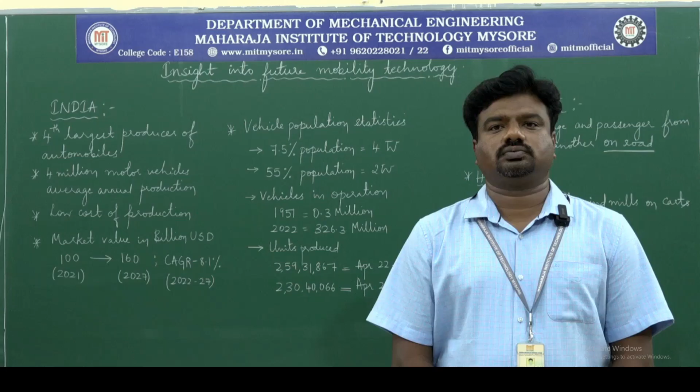Today I am here to deliver a session on insight into future mobility technology. Let us try to understand what do you mean by the phrase insight into future mobility technology. See, the word insight refers to the detailed or complete understanding on things or the area wherein the objective is focused accurately. Means to say that to gain an accurate knowledge on something or some area wherein we are focusing, that refers to the word insight.

Then the word future mobility technology. It is a common identity for a mechanical engineer to possess his passion towards automobiles. Yes, what do you mean by automobiles? Automobile means it is a carrier which carries the luggage or passengers as well as the luggage and passenger from one place to another place on road. So whenever we are focusing on transportation of human beings and luggages and animals on road through a medium where we opt for vehicles, we categorize that as automobiles.

While if it is on water, we go with marine engineering. Whether it is in air, we study the content under aerospace engineering through airplanes. Okay, see, the evolution of automobile engineering is not from 19th or 20th century. It is seen from the 17th century when people started using the mounting of small windmills onto the cartwheels, so that as and when the cartwheels are carrying the passengers from one place to another place, these windmills used to obtain the energy from wind and convert that energy into the motion or the movement through wheels.

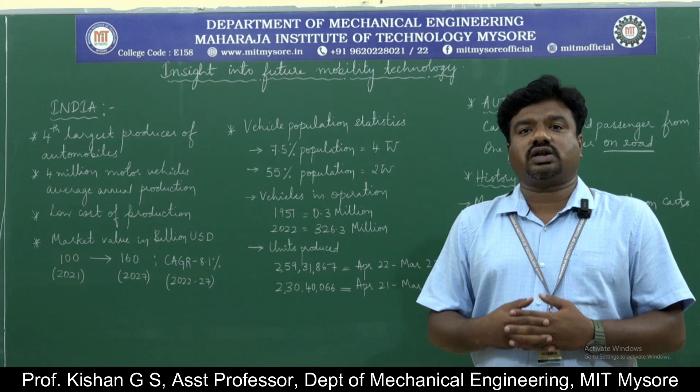This particular data relates to why we consider India to be the automobile manufacturing hub, or what is making India the fourth largest producer of automobiles. See, between April 2021 and March 2022, the number of units, that is number of automobiles produced, were 2 crore 30 lakh 40,066, while in the financial year 2022-23, the number of units increased to 2 crore 59 lakh 31,867. So we have almost 30 lakh increase in the number of units being produced in India. This is why we are supposed to focus on what is the future for mobility technology.

Future mobility technology is nothing but the innovation towards transportation with a lesser amount of emission from the exhaust, as well as the adaptation of technology leading from electrification of vehicles to autonomous vehicles, which are nothing but driverless vehicles.

With this focus, let us try to understand what we mean by electric vehicles, what the different types of electric vehicles are, what components contribute to the functionality of electric vehicles, followed by advantages and limitations. See, what is the major difference between IC engines or fuel powered vehicles and electric vehicles?

In the case of fuel powered vehicles, the internal combustion engines use fuel like petrol and diesel and generate heat, and that heat energy gets converted into mechanical energy, and that mechanical energy is transferred onto the wheels, and that results in solving the purpose of an automobile.

While in the case of an electric vehicle, the major source is the electric motor that is powered by the battery, which results in propulsion of the vehicle, that is, movement of passengers and goods from one place to another, satisfying the demand of an automobile.

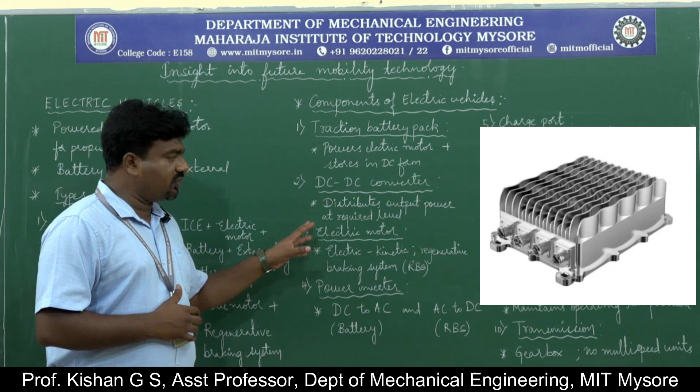Next comes the DC to DC converter. Why this DC to DC converter? See, whatever might be the power which is available from the battery, the traction battery pack has the capacity of providing a constant voltage DC source. But the components which contribute to the function of the electric vehicle need not have the same amount of power which is required to operate or to function. So in that case, we go with the DC-DC converter, one among the major parts of an electric vehicle that contributes in distributing the power at the required limits or at the required range.

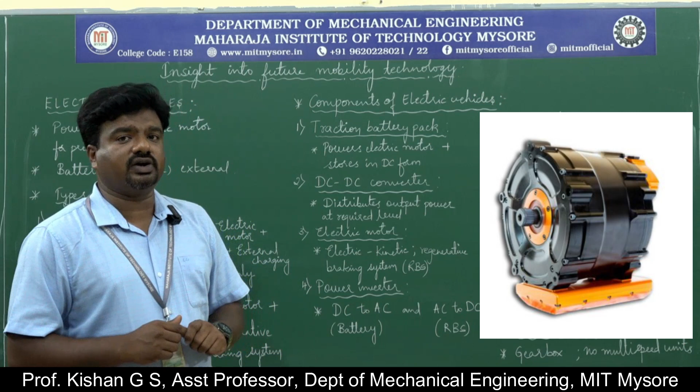Next comes the electric motor, the heart of the electric vehicle, that supplies electrical energy received from the battery to the wheels in the form of kinetic energy, resulting in the propulsion of vehicles from one point to another point. Also, if the vehicle is of the hybrid EV category, that is, if the vehicle is operating under a regenerative braking system to recharge the battery source at that particular point of time, this electric motor acts as a hub to the regenerative braking system as well. This is a very key point to notice. Kindly do remember the concept.

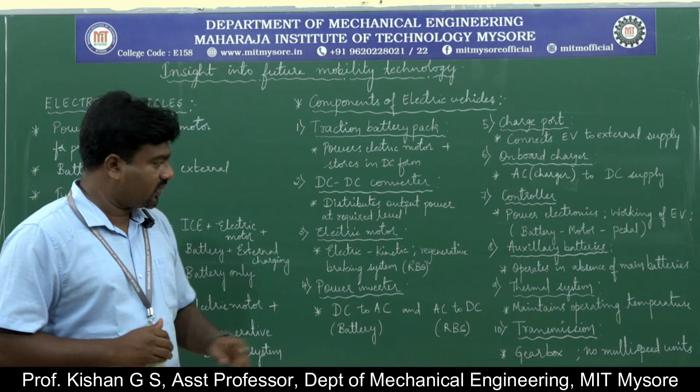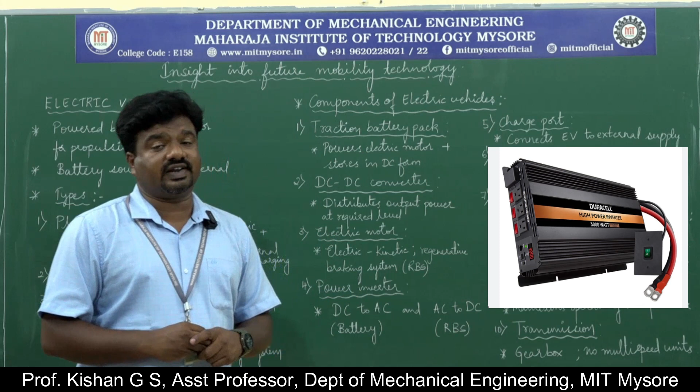Next comes the power inverter. See, the concept of the power inverter is that whatever power is available from the battery has to be converted from DC to AC, while if it is a regenerative braking system platform, there the power is to be converted from AC to DC. For this conversion of DC to AC, while it is being supplied from the battery, as well as from AC to DC in the case of a regenerative braking system, the power inverter is the one that functions.

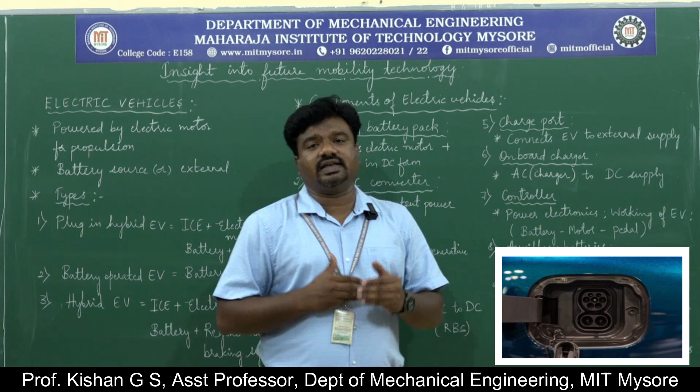Next comes the charge port. Yes, this is the port that connects the EV, that is the electric vehicle battery, to the external supply. So whenever we say that charging has to be accomplished, this is the charge port that functions in connecting the entire electric vehicle battery resources to the external supply and keeps recharging the batteries as and when required to operate.

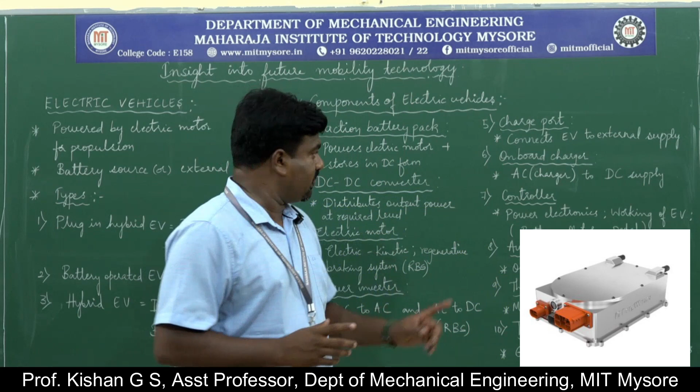Next comes the onboard charger. So this onboard charger is the charger which is available in the platform or in the system, where it converts the AC source received from the charger to DC supply, while the DC supply can be transferred onto various components at the required rate by the DC-DC converter, such that the functionality happens without any deviations or without any delay.

You might have seen plenty of accidents that are happening in EVs nowadays, which are predominantly true. Where does that particular fault start? One among the major faults that starts the failure of EVs might be the onboard charger as well as the DC to DC converter. So when there is a delay in operation of these two, this might result in generating shock or variation in the power supply. That might be one among the reasons that results in catching fire or malfunctioning of the electric vehicle.

The next component, the controller. The controller of an electric vehicle is the power electronics hub that completely takes care of the working of electric vehicles. From where? Straight away from supplying the electrical energy from the battery to the motor. From the motor, the amount or the voltage that is to be transferred onto the wheels is based on the application of force on the pedal by the driver. That is where this power electronics hub, or the controller, starts supplying electrical energy to various components based on the speed or the power that is to be attained by the vehicle wheel, so that the transportation is accomplished.

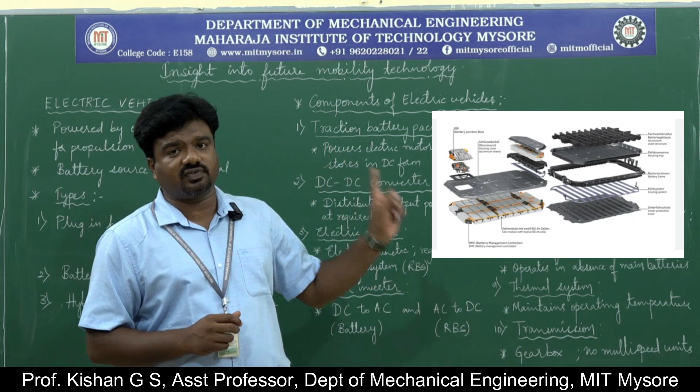Why? Because in every phase of its operation in electric vehicles, there is an emission of heat, and that heat will always be accumulating over a period of time. So that increases the overall heat or the temperature of the system. So to maintain that, this thermal system operates with the cooling platform to reduce the operating temperature, to exercise more heat liberation while limiting the amount of heat that could build in the system.

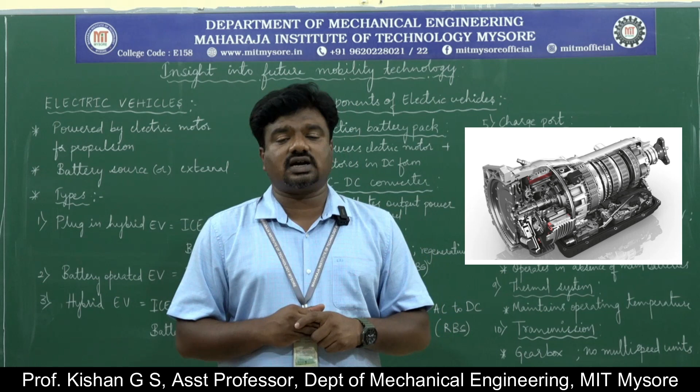The last one, transmission. Here, even in EVs, gearboxes are available to transfer the amount of energy required from the motor to the wheels based on the application of the pedal. But the main advantage is that in this particular case, you need not go for any multi-speed transmission units that are available in case of IC engines. So these are the components that completely take care of the conditions at which electric vehicles are supposed to operate.

Now, let us go with the understanding of advantages and limitations of electric vehicles. Whenever we bring about this particular topic, it's always in comparison with the IC engine or fuel-based vehicles. The limitations are obviously there, but the advantages have the predominant effect of bringing EVs to the market in the coming generation. The first advantage is less noise pollution, where electric vehicles, you might have observed, cause very little noise on the road during transportation. The second one is eco-friendly propulsion.

When compared with an IC engine, if you want maximum power, what do we do? We have the statement, right? Drop the gear, disappear. You just bring the gear down from 3 to 2, 2 to 1, so that the transmission system provides the maximum power required by the driver or the vehicle to move from one point to another.

While here in EVs, you don't need to worry about bringing down the gear or focusing on the gearbox or the transmission. The force applied on the pedal results in more and more electrical signals supplied from the battery to the motor, so that it is transferred onto the wheels. So there is no enforcement on the vehicle during its propulsion by changing the gear or giving load onto the transmission. That is where eco-friendly propulsion comes into picture.

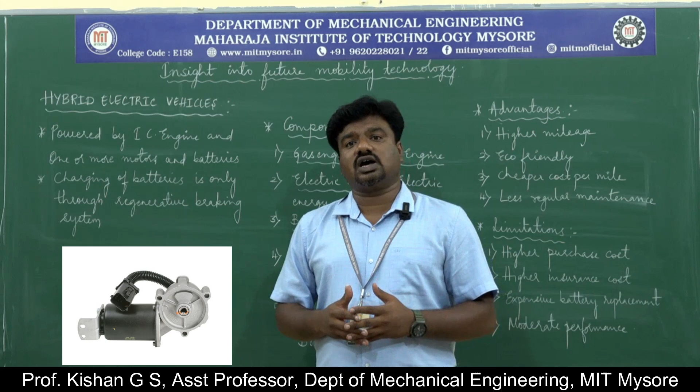Now, let us try to understand the concept of hybrid electric vehicles. As we have studied the different types of electric vehicles, if you recall, hybrid electric vehicles fall under a category wherein external supply is not allowed to recharge the battery upon the consumption of energy from the battery. Yes, means to say that the regenerative braking system results in charging the batteries in this type of hybrid electric vehicles, which are powered by IC engines and one or more electric motors. So this is the brief description of the category hybrid electric vehicles fall into.

While if we head into the components forming the hybrid electric vehicles, most of the components we have studied in case of electric vehicles remain the same except the charge port as well as the onboard charger, because the option of charging the batteries from an external source is not made available in this category. Hence, the components that rely on the external charging system will not be available in hybrid electric vehicles.

The major components of hybrid electric vehicles start with the gas engine or the IC engine, where the engine runs on fuels for generating mechanical output, resulting in transmission of power onto the wheels, while the second component is the electric motor, which is the heart of the system that transfers electrical energy received from the battery into kinetic energy. As well, in this case of hybrid electric vehicles, which operate on a regenerative braking system to recharge the battery, the electric motor itself acts as a hub for regenerative braking. The next point is the battery, which powers the electric motors that convert electrical energy into kinetic energy. Next comes the control unit.

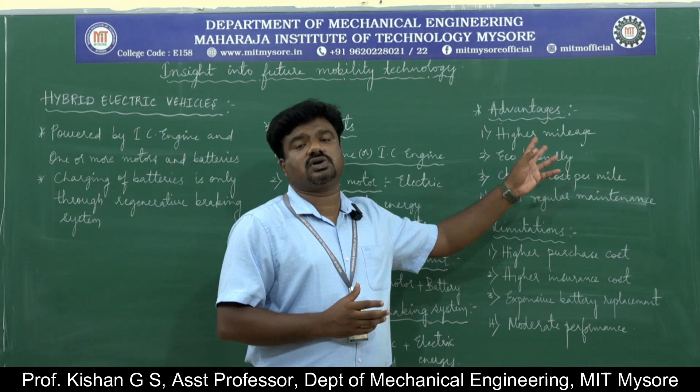One of the major advantages of this category is higher mileage, because the vehicle uses battery power in the beginning, and in the long run it makes use of the power supplied from the internal combustion engine. That results in better mileage compared to normal fuel-run engines. Second, it falls in the eco-friendly category, because of lesser emissions compared to normal fuel-powered engines, due to the adoption of both types of propulsion.

Next is cheaper cost per mile. Obviously when the mileage of the vehicle is higher, the investment on fuel or on battery recharging leads to a lesser expense per mile travelled by the vehicle.

Next comes less regular maintenance. Normal fuel-powered engines require maintenance at about every 5,000 kilometers for a petrol vehicle and 10,000 kilometers for a diesel vehicle, whereas here it is a mixture. We have electric vehicles that run for plenty of miles, greater than what normal fuel-powered engines would give.

Hence, in comparison with normal fuel-based engines that have to be taken for maintenance every 5,000 or 10,000, here less regular maintenance is required because it operates in both conditions, leading to lesser utilization of the IC engine compared to a normal IC engine vehicle. But that doesn't mean there are no limitations. We have limitations as well for hybrid electric vehicles.

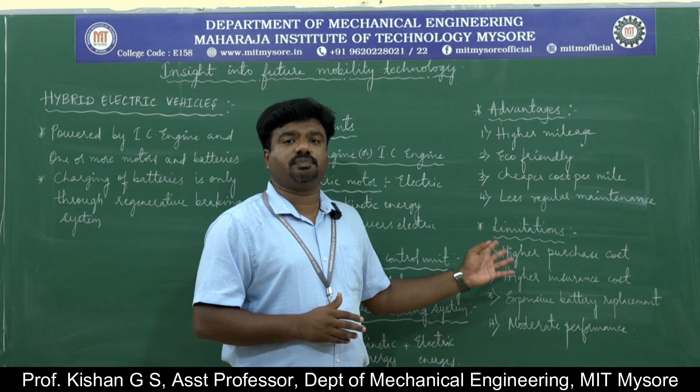The first one being the same, higher purchase cost. Next being higher insurance cost. This seems to be the fascinating term. Why? Because the vehicle runs on both the IC engine and the electric platform run by the electric motor, if there is any delay in controlling the transmission between the IC engine and the battery-supplied motor, there might be a chance of malfunctioning of power transmission that leads to huge disasters. Hence, there is a requirement for higher insurance cost.

That doesn't mean the vehicle is not safe, but it is to ensure the vehicle is insured for a larger amount so that whatever disturbances might happen on both platforms, the IC engine platform and the electric vehicle platform, both are covered under insurance.

Next comes battery replacement, which is again expensive in nature, as in the example we took for electric vehicles. The performance seems to be moderate because it operates on both conditions, and the performance of the EV as well as the IC engine is to be taken into account. Hence we categorize it not as a better performer in the market but as a moderate performer. So this is about hybrid electric vehicles for your reference.